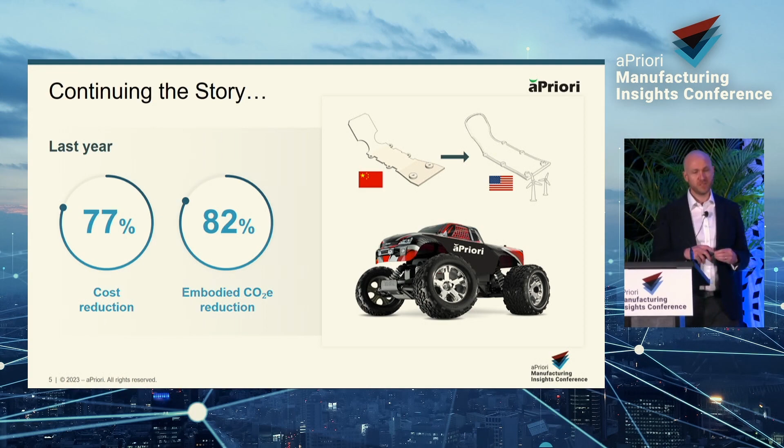So last year, we developed an RC car, which we gave away. And we redesigned a sheet metal assembly into an injection molded component. And we saved 77% on cost and 82% reduction in embodied carbon equivalent emissions. So we've got a pretty high target to beat this year.

And since then, as Peter and Stephanie mentioned already, the world's become a lot more complex. Developing products is a lot more complex than it's ever been. Sustainability is adding additional requirements, and new regulations and directives are adding additional challenges and costs. Competitive pressure is always there, it's increasing, time to market is more critical than ever. And products themselves are becoming more complex, and development times need to be shorter.

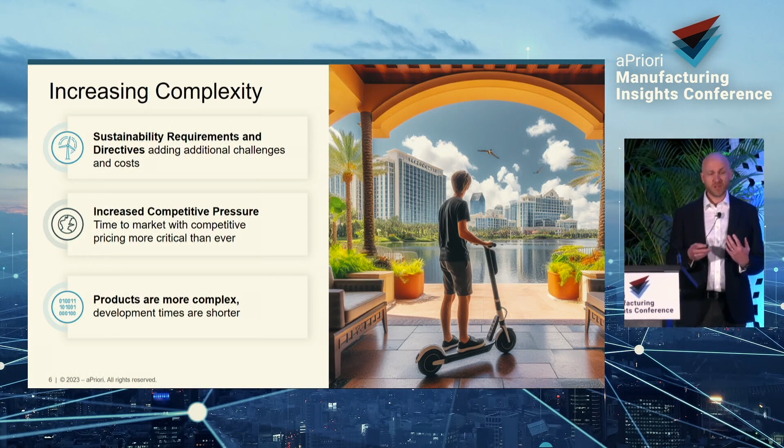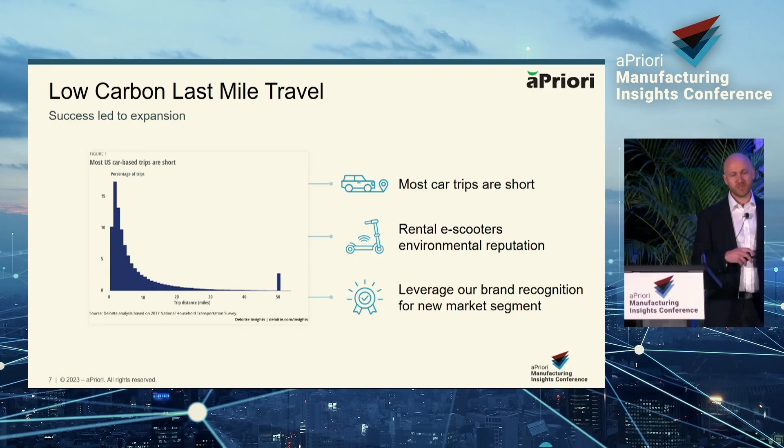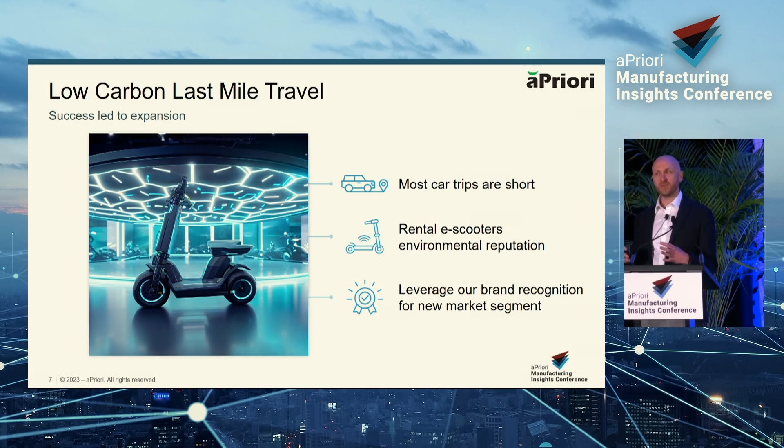So where we're going, since the RC car, we've expanded into e-scooters. The reason for that, most car trips are quite short. Rental e-scooters got quite a bad reputation, as they often get discarded and don't end up in the right hands. They are often confiscated and misused. So what we want to do is leverage our brand recognition from our RC car and move into this new market segment. We've had some initial success in the US, and we want to expand into a European market.

So some of the business challenges. We've got some really strong forecasted growth in the space. But one of the challenges is CBAM. If you've not heard of CBAM, it's the Carbon Border Adjustment Mechanism. It's just entered into effect. It's adding a price of carbon, embodied carbon, on certain materials imported into the EU. So that's going to be a challenge.

Shipping costs are increasing. Can we nearshore manufacturing? That's been mentioned a number of times. Is that something that we can investigate using aPriori? And customers are driving sustainability. They're more aware than ever of greenhouse gas emissions and embodied carbon. So we need to make a significant reduction over the current generation product.

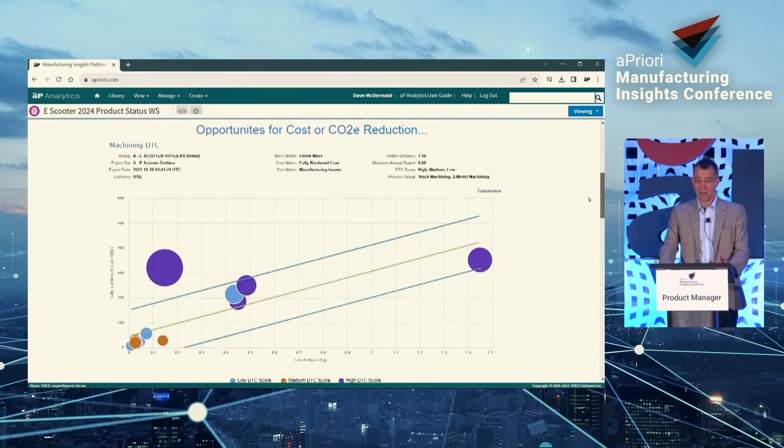And on my AP Analytics dashboard, I also get to see those opportunities to go and talk to the team about. Here I can see for every component, as it's being designed, the dollar per kilogram of weight of that component. And therefore I can more easily spot the outliers. This component here is more expensive per kilogram. This component over here is just heavy. That's an obvious opportunity for carbon reduction.

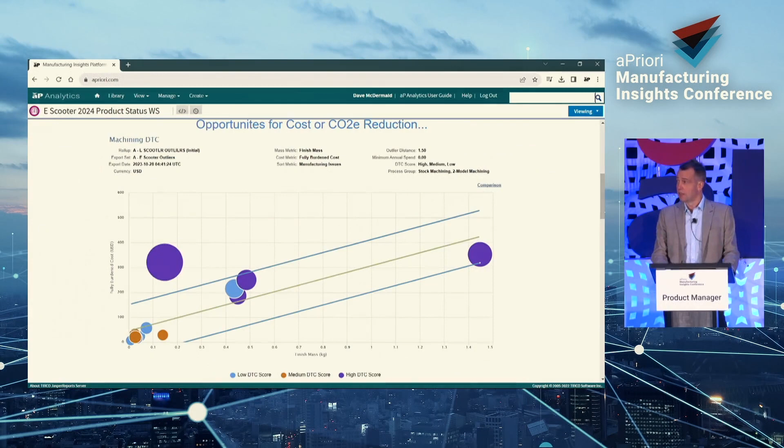I can also drill down to see what all the manufacturability issues are behind them, because they drive cost and carbon too, and talk to the team, maybe look at supporting the design teams with feedback on what they should be focusing on.

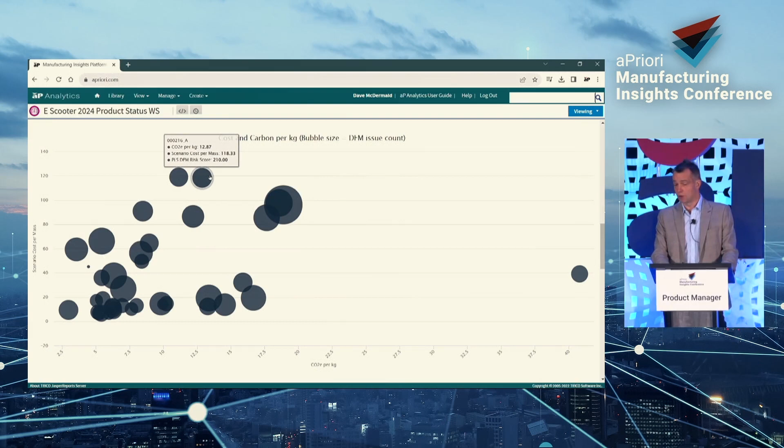This graph here takes those same components now during the design phase, plotted on a graph of cost per kilogram versus CO2 per kilogram. In other words, the bottom left-hand corner are components that are good. The periphery of this diagram are opportunities for cost and carbon reduction. That one there is a carbon reduction opportunity. The ones up here, cost reduction opportunities. And I want the teams to go and look at all those peripheral components and start doing something about it during design.

Now the beauty here is that we have a balancing act to do, but when I have visibility of my cost target and my CO2 target and how I'm against them, I can start to make trade-offs. I could actually go to Norway if carbon is our problem and spend a little bit of money to get that target done at the risk of a little bit of cost.

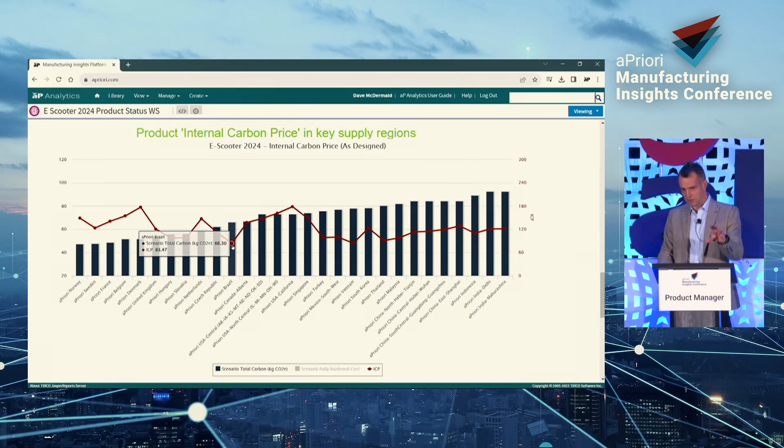Now in there, I'm looking at Eastern Europe as the obvious place for our European market to go, but Brazil stands out there too. And that's interesting because we also have a North American market. And Brazil is kind of a place where we'd love to go, and maybe we could do a bit more maths now to work out what the duty and tax and logistics implications are of manufacturing in Brazil and supplying to North America and to Europe. It's a complicated equation that we just need to get insights into now, because it takes a while to do all this planning.

Bringing the team together to actually take these opportunities and realize them is difficult, so we use aPriori Workspace. We use that to collaborate among different team members. And these team members get to have conversations, and I have visibility of those conversations because they can make trade-offs. They can make decisions in a vacuum that have implications for April. The design can affect the procurement challenge. I get to see what they are and have visibility for how they're getting on with things, because this is my KPI. We've got to meet our objectives. So you've got some real impressive insights to guide the team.

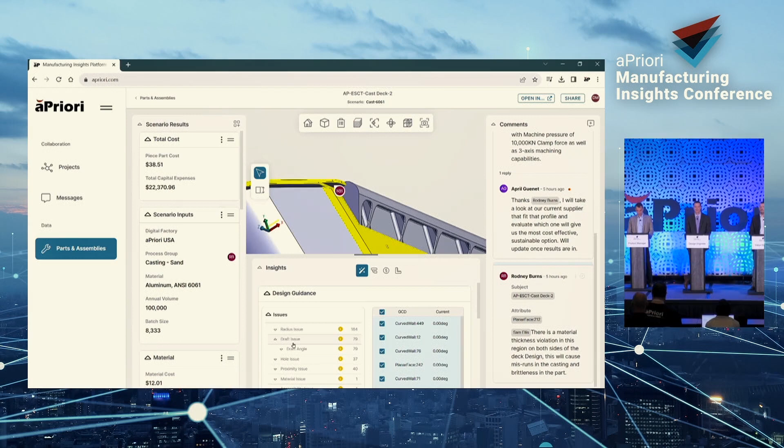So how would you have done that traditionally before aPriori? Well, we wouldn't have. We didn't have any visibility of cost or carbon until it was too late, obviously.

Do you have a slide on that? I do. You do? Oh, beautiful.

Great. So we didn't have any visibility. It was too late. We would only find out the cost when we got to the supplier and they gave us their quotes, which was clearly too late to make any sort of dent on it. So we certainly couldn't identify opportunities either. And even if we could identify opportunities for carbon and cost reduction, it was impossible to collaborate on the real detail of that. So we'd make a decision about the design, and then April would have a real problem in supply chain for processes that are difficult to get suppliers for. Complicated equation that we couldn't get our heads around.

What kind of a difference has aPriori made here? Well, first of all, we used to miss our targets every year. In fact, most companies do, but we are hitting our targets now. We set a target cost and we get there immediately. Same with carbon, because it's becoming important for our business. We've set objectives to the marketplace. So we get them done. Because we can actually realize opportunities in cost and carbon improvement, because we get the insights early and we have time to do something, we're actually overachieving our targets now for the first time in our history.

Which means I can sleep at night. Good stuff. So Sam, you've got the guidance from product management. Talk us through your workflow when it comes to the new scooter design.

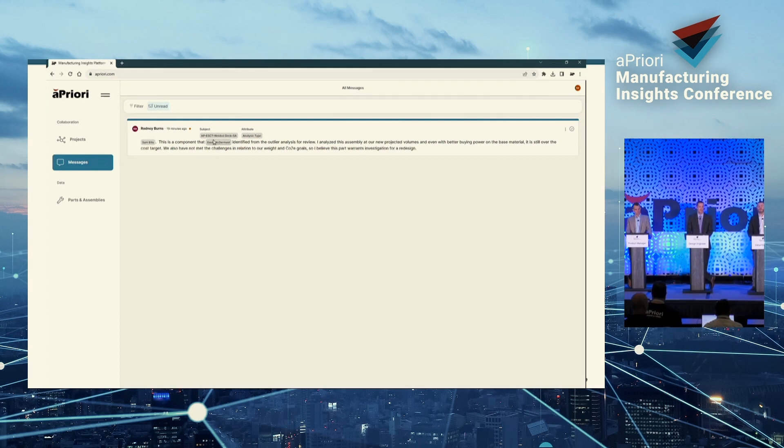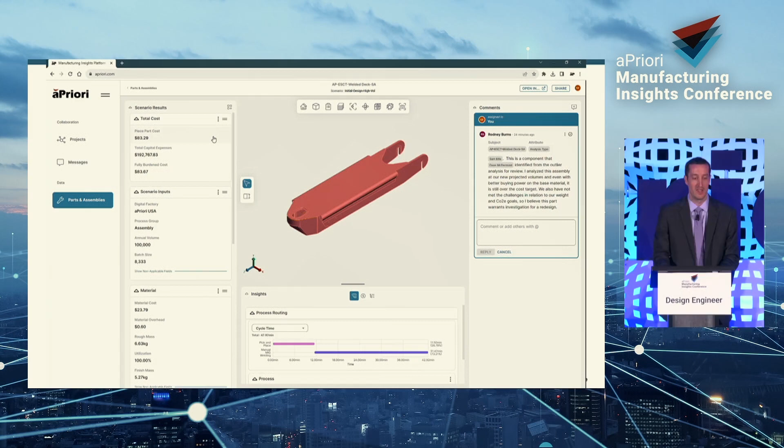Sure thing. All right, so it starts off, I get an email, and I can see it's a message from my buddy Rodney in cost engineering. And what's nice is I don't have to search through old Teams messages. Everything that's relevant to the scenario I'm looking at is all loaded in AP Workspace. And I can quickly visualize that in aPriori Rodney analyzed our existing assembly at the new higher volumes, but we're still coming in over our cost targets. And we're over on weight and CO2 as well.

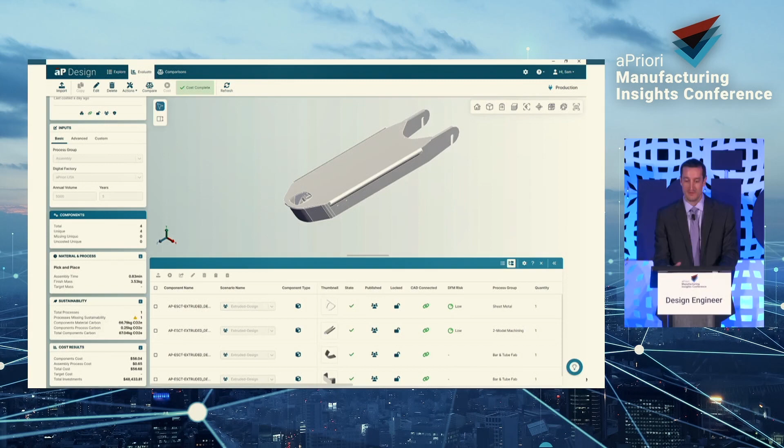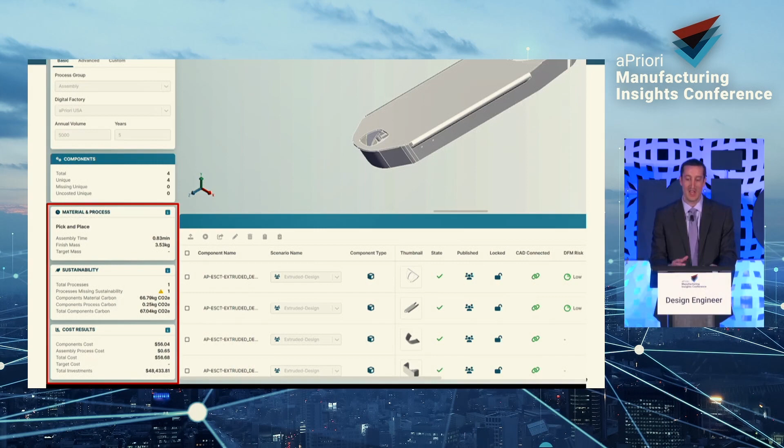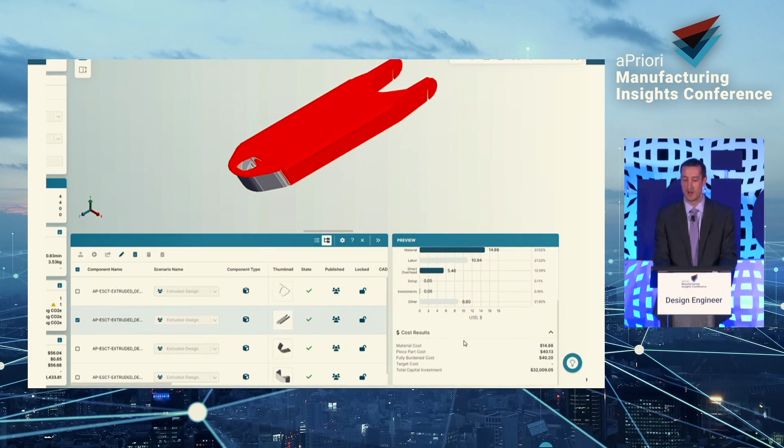So I need to go back and redesign this part. And my first idea is to reduce the complexity by lowering part count and going with some custom extrusions. And that decreases my cost, sustainability, and weight. But I'm still coming in a little high, mainly due to that large custom extrusion there that's making up the majority of the cost. So maybe I want to consider a casting.

And instead of spending the time going and redesigning, I'm just going to shrink wrap that assembly into one part and then rerun that analysis in aPriori. And obviously, this isn't designed for a cast part, but I can quickly see from a directional standpoint if this is going to make sense to spend time on in CAD.

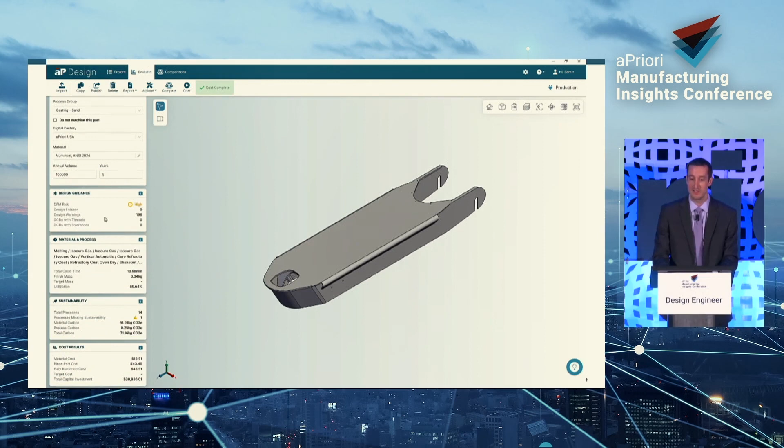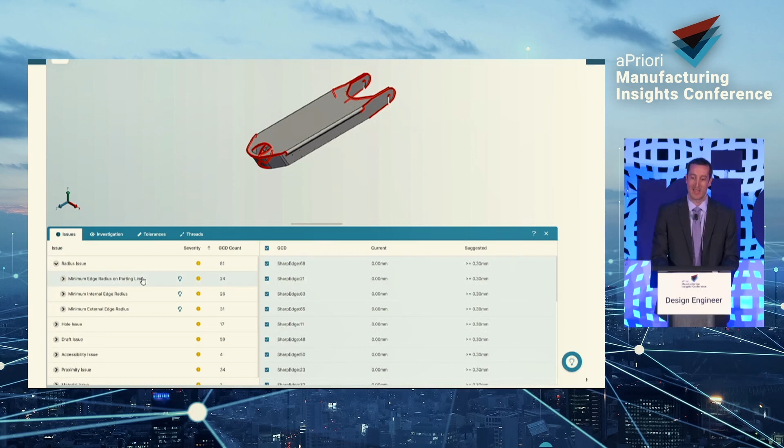So I'll launch that directly into AP Design, specify my parameters. I'm staying with aluminum 2024 that I used in our existing product. And I can see that I'm going in the right direction from cost. I reduced that from our extruded weldment there. But I want to now get an idea of, OK, when I go back to CAD, what do I have to take into account when I design this cast part?

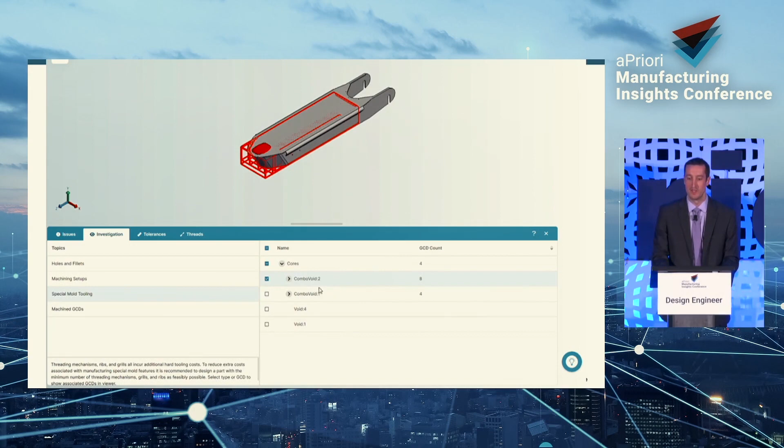So I can look at any sort of issues that aPriori is highlighting. And if I need to understand why something is critical, I can always open up a tooltip to let me know why that's important. Under the Investigation tab, I can take a look at the special mold tooling to understand what complexities are involved with this current part. So how am I going to redesign this to avoid that complex tooling?

And back in the CAD system, you can see I now redesigned this, eliminated those complex tooling areas, added in some draft angles, and now I'm going to just repeat that process, launching into AP Design and specifying my same parameters as before. And what's nice is that this is only taking me a few minutes, right? I live in the CAD system most of my day. I can just quickly run and understand how that's going to impact my part.

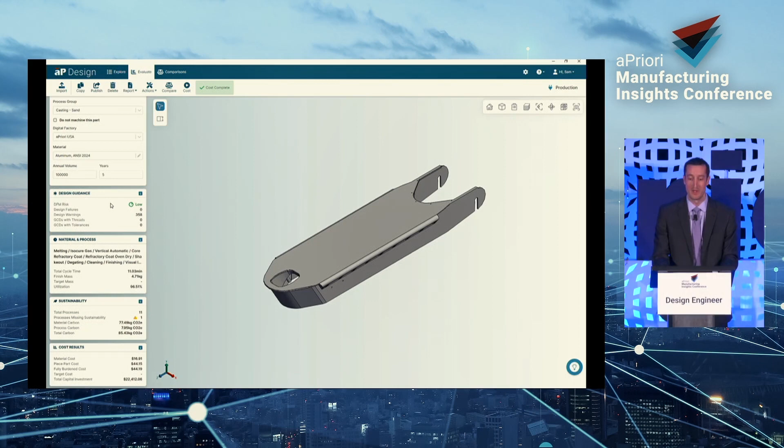Right away, I can see my DFM risk is low, so that improved. My cost is decreased a little bit, which is nice. I'm a little higher on that weight and sustainability, but these are all trade-offs that I can then deliver to my project manager, Dave, and he can deliver the best product possible for our customers.

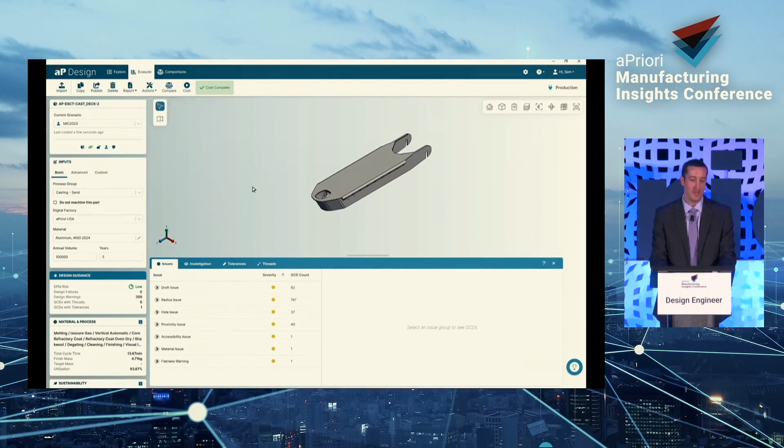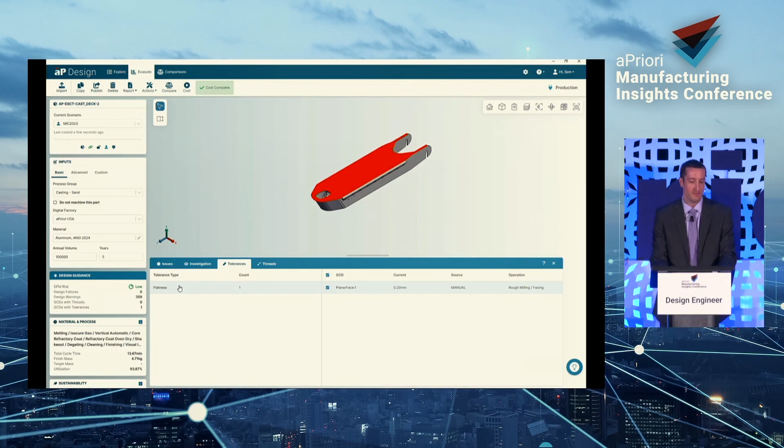And if I want, I can start playing around with tolerances now. So maybe we had a quality issue with the stomp pad before. We had poor adhesion. So I want to understand how a flatness tolerance will impact the cost of this part. When I reanalyze, I can quickly understand what tolerances are driving any sort of specialized finishing. In this case, a machining operation has been added. And I can understand how I have to back off that tolerance in order to eliminate that as an option.

So once I'm confident with my design, maybe I'll have some tweaks here and there, but I'm in a good space for now. I'm going to come over and tag April in procurement to let her know that we're looking at a casting part. But do we have any extrusion or casting suppliers who we're really confident with currently? I also want to ask her about the material choice, right? Our current selection was aluminum 2024, but maybe there are some similar alloys that we get better rates on from our supply base, and we can extract a little more cost out of this part.

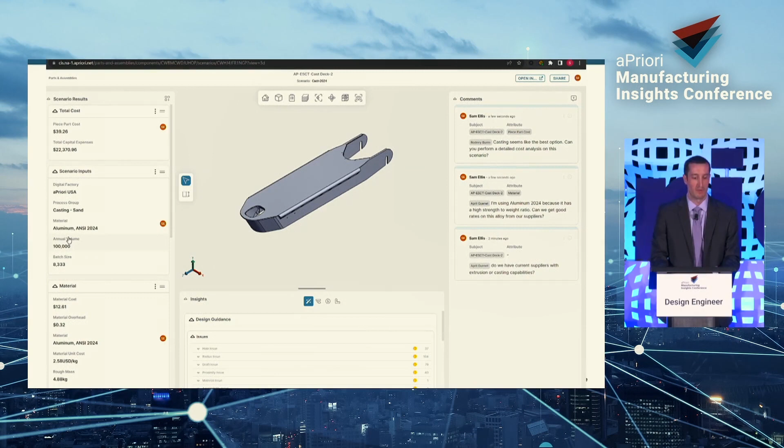And finally, I'm going to tag Rodney in cost engineering, let him know I'm confident with my current design, and he can perform a full, robust cost analysis, maybe do some other trade-offs to understand really what's going on with this part. And now that I'm done, I can go back and work on some other redesigns.

Thanks, Sam. So I can see you've really learned a lot about those designs by running them through AP Design. So how would you have done that before? Yeah, the short answer is we really couldn't, at least not to that extent. Our design process was really quite siloed, and we'd rarely get feedback from other departments until after we completed the design.

So using this platform approach, what's this new way of working really enabled from your perspective? Well, as you saw, I can run through way more design iterations than I could previously. So I can look at cost, manufacturability, and sustainability insights, and that allows me to eliminate or pursue an option without waiting weeks for feedback from other departments or from suppliers. And now I can pull in my other stakeholders to collaborate earlier in the process than I did before.

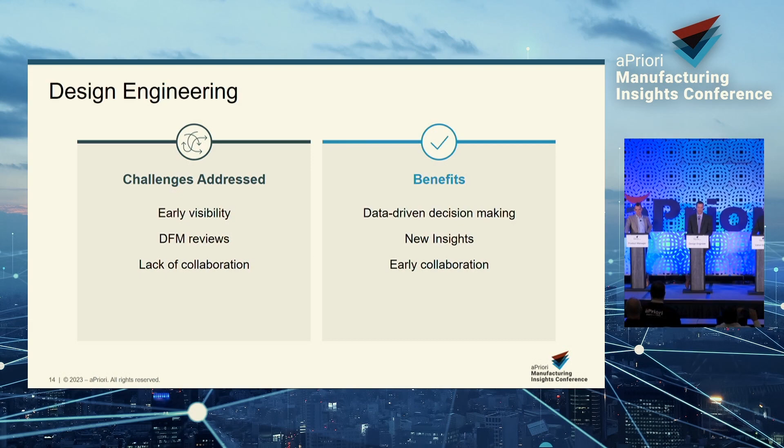Great. Thanks, Sam. Now, Rodney, in value engineering, we've already heard you've been inputting into the project, both from product management and design engineering. So lots of collaboration already. Tell us about the role you played in developing the e-scooter. Sure, no problem. So I'll start off. Dave mentioned at the start he found an outlier on the chassis, and he asked me to investigate it as part of my role in value engineering.

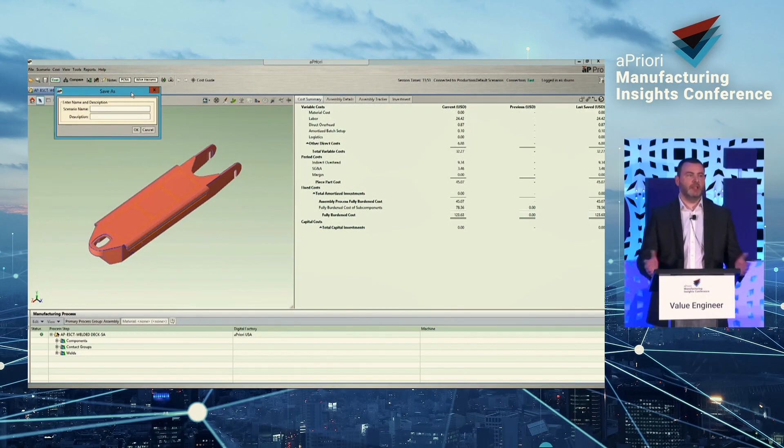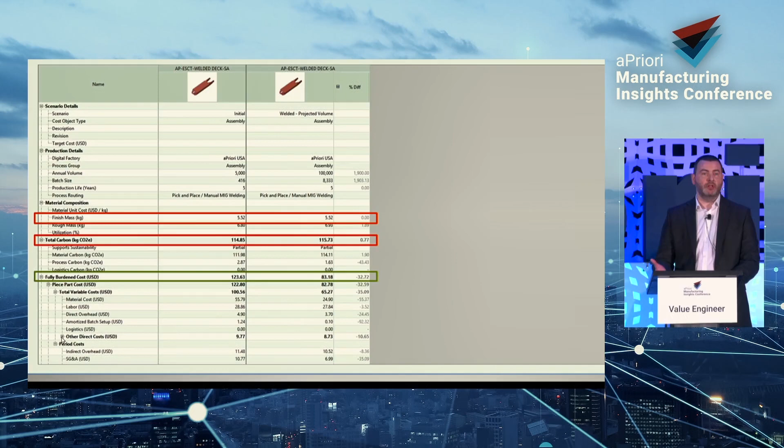So my first port of call here is I'm going to scale that up to the projected production volumes to see will the existing process scale with our projected volumes, and I want to get that answer as quickly as possible. And the simulations are very quick and concise to run, but I want to see it's a multi-variable equation. It's not just cost with trade-offs. But you can see we can scale a little bit with volume, but we're going to fail on our sustainability goals and our weight goals, so I can notify Sam that it's a candidate for redesign.

But that's a two-way street. So as Sam mentioned, he notified me in AP Workspace that he's looking at a casting now, he's redesigned it. And we mentioned there an alternative material. So again, value engineering, I need to determine if it's economically viable to do so. So I'm going to start to look at this component as an alternative material. Does it make sense? So I can look at that from not just a cost perspective to see what the implications of the source material are, but also from the sustainability perspective as well.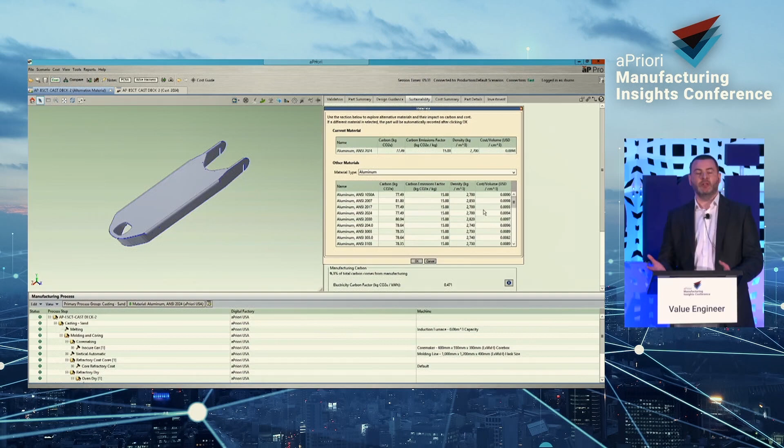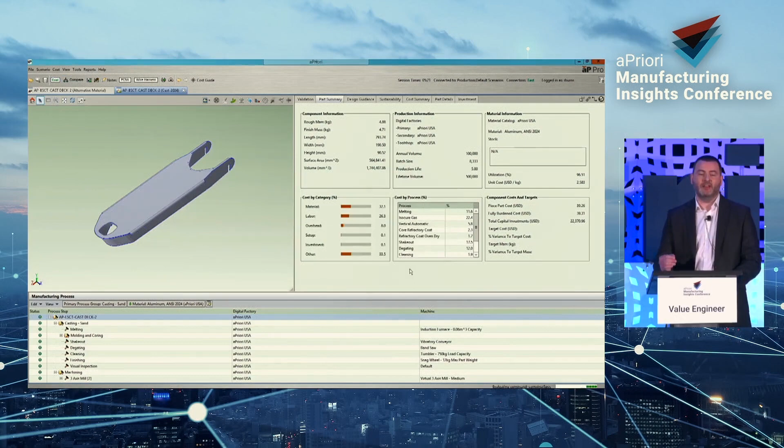These are trade-offs. What lever I pull will have an impact on another one. And again, it's a multi-variable equation, and I can get those results. But I first want to see, is it viable to take forward and investigate further with people's resources and time? So again, I want to see these in an easy, digestible manner. So I'm going to run these as that comparison analysis again, so I can see those trade-offs very quickly, very concisely, and get to that value assessment as quickly as possible. We don't want to waste time.

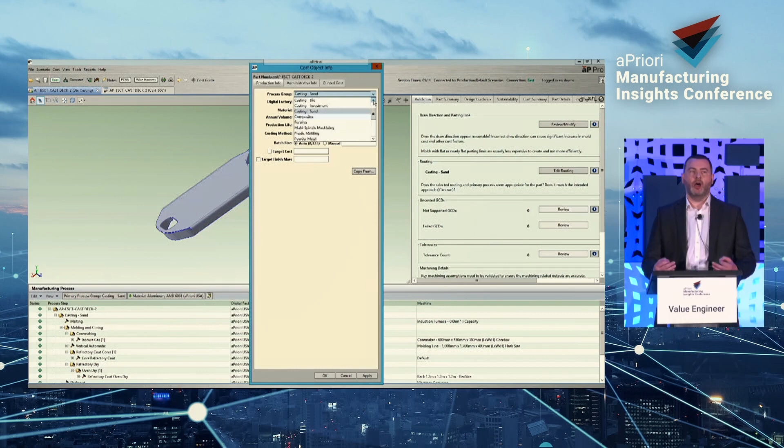So you can see here that there is a small improvement on the actual cost, but there's a significant improvement here on the sustainability. So I can tell Sam that's a viable option to go with and let him continue. But because he's told me he's designed this as a casting, my thing is I want to get the optimal manufacturing process as quickly as possible, so I can run this through various manufacturing methods and methodologies. So I'm running this one as a die casting to see if that's a more viable solution. We have some sand casting productions from the RC car from last year, but I want to see, is that our optimal process to meet our cost targets?

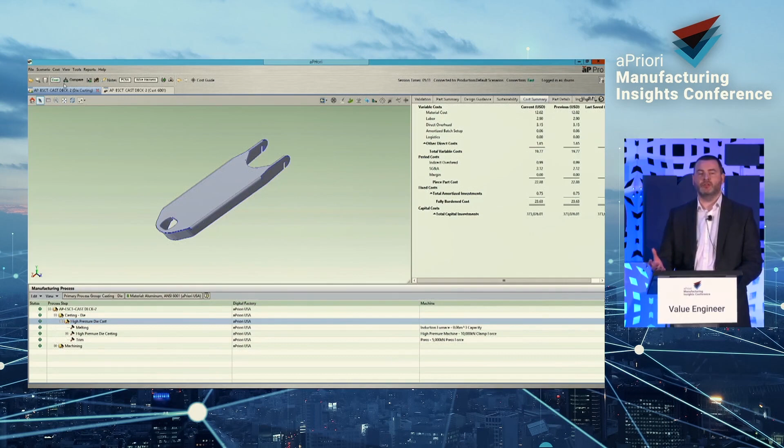So we can see the process here, and there's a new should cost, but again, I want to do that trade-off analysis. Should I make it in-house or should I buy it? What's my capital investments? These are all things that I need to understand to make those decisions going forward, and I want to get to them as quickly as possible. So you can see here in this case, we have significant savings in both cost and carbon as well. So I know die casting is my optimum process here.

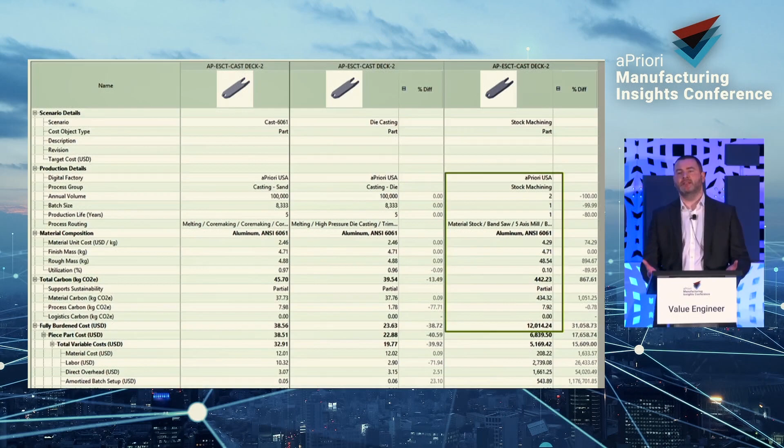But because of the speed of these, April had mentioned to me in conversation that she often feels for prototyping, she pays above the fair market price, and it's an assumption, it's a feeling. I quickly ran a simulation while grabbing a coffee on stock machining, and now I can pass downstream some indicative prices as what we should expect from a should cost sort of aspect.

Now, as a value engineer, I want to get to that optimal manufacturing process as quickly as possible, but I want to see it in much more granular detail. Once I find my primary process, I want to optimize and refine it and effectively mitigate risk. I want to avoid challenges in the manufacturing process. So here we can see I'm looking at a wall thickness issue that's been highlighted. We're under the 3 millimeter tolerance here, so there's locations. And I can use aPriori to actually find those locations.

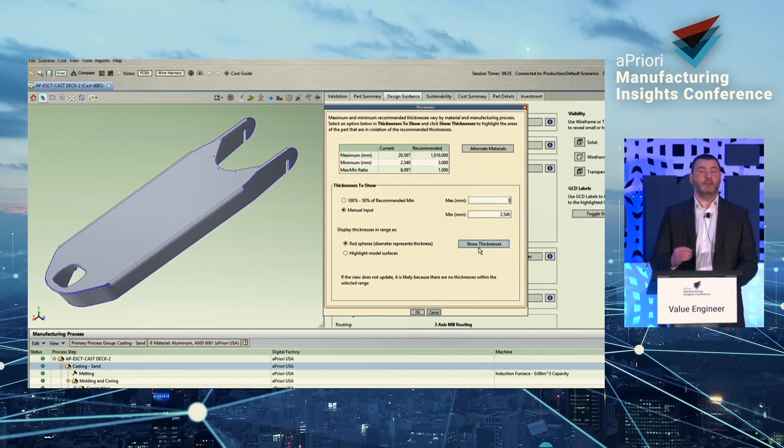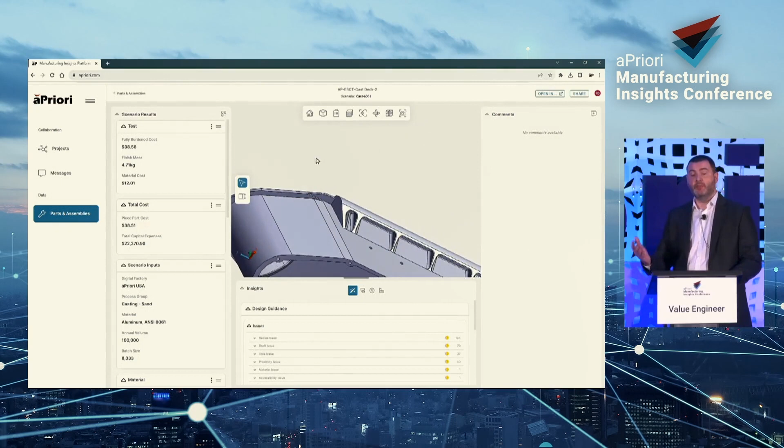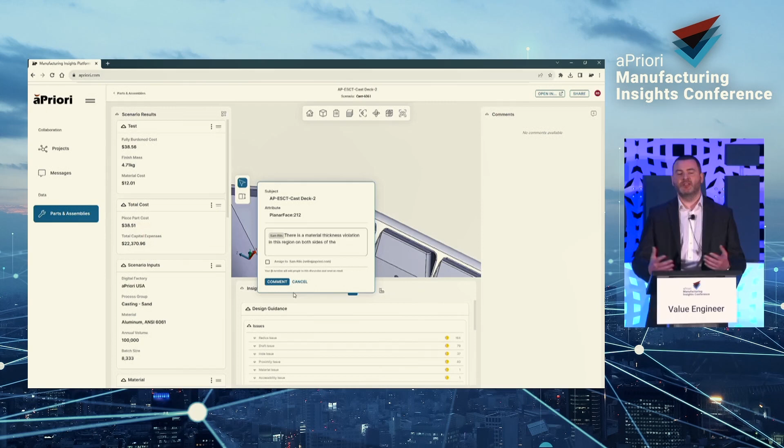This is going to increase scrap either for me, an in-house manufacturer, or the supplier. And I can identify where these regions are through AP Pro. Now, in AP Workspace, I can go in and highlight that issue directly visually for Sam in design. And I indicate where the issues are, but also the implications of that issue. It helps build his knowledge and get to those decisions. And he can refine his design before he releases it, because we don't want to waste time going through lengthy engineering change order processes. So Sam can go to that directly and make any amendments needed.

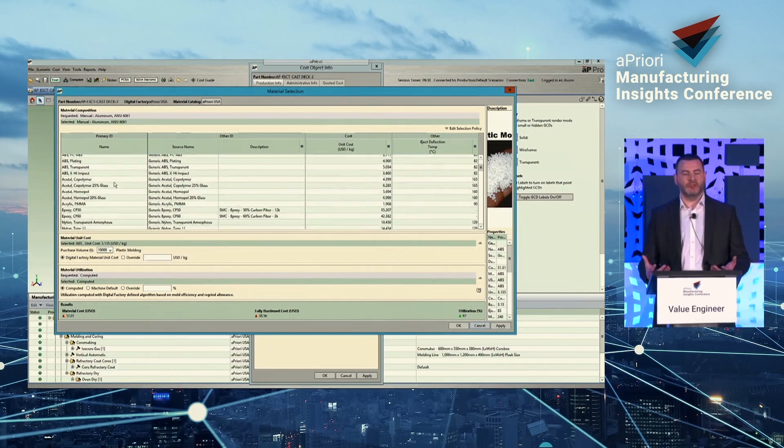But that's upstream. One of the other things is I can now optimize my time as a value engineer and look at other options I wouldn't be able to do. So in this case, the material thickness gave me the idea of, well, what if we did this as a plastic part? We can start to test assumptions and theories and look for viability elsewhere within that value rule. So I can see this part, there's some viability, but I don't want to waste time for Sam redesigning the part. So in this case, I'm going in and I'm actually going to change the nominal wall thickness without wasting his time doing CAD changes to see, is there viability in taking this forward and investigating that and applying those resources before we do any FEA analysis or wasting time.

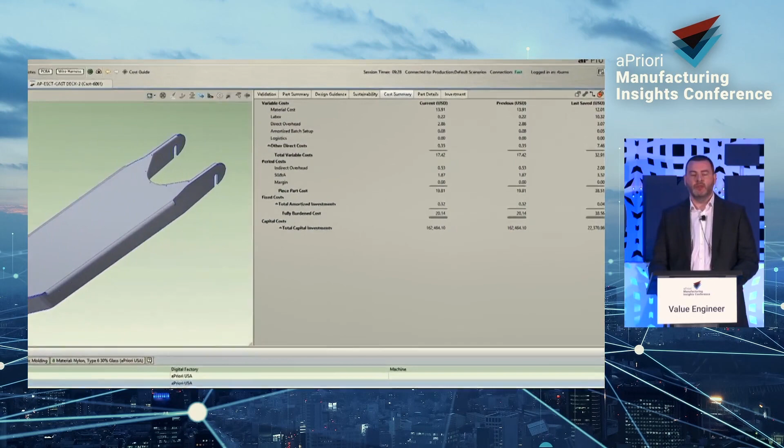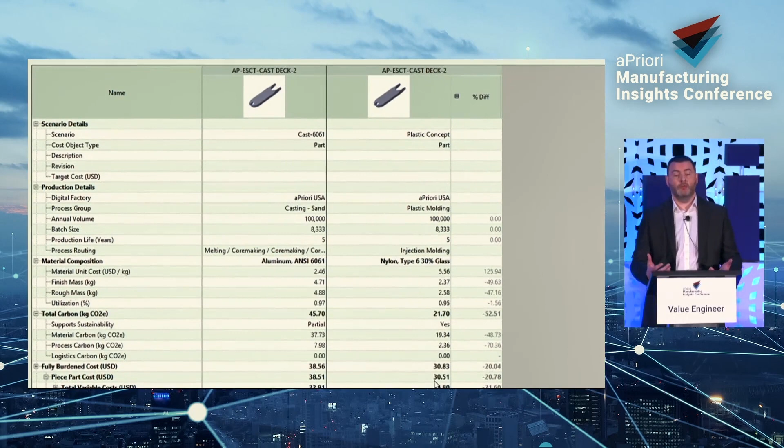So we can see there is some degree of viability here. We started off with a cost just below $39, and we're now down to just under $31. So when you scale this across our volumes, there's significant savings to be had there. So I can notify Sam of this and say, we are making improvements both on cost, but also on our carbon as well. So can we please investigate? And I'll collaborate with Sam and he'll give me some feedback back and forward and we can refine that without too much effort. And I can actually then see, is it a viable solution?

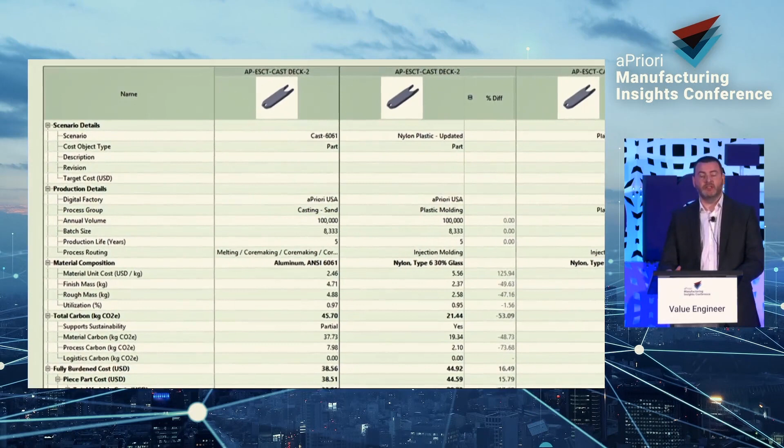So the updated design here, we can see, yes, we made significant improvements on our CO2, but our cost has now gone the other way. So it's no longer a solution for us. So we can eliminate them much earlier in the process before we get to a gate review.

Now that's upstream support, but it's a two-way street, so I can pass that downstream as well. So now we have done the make versus buy. I can now notify April in the supply chain and give indications of what the actual requirements are from the supplier, from manufacturing requirements. So what types of equipment, machinery, et cetera, are we going to need to optimize her supplier selection when she comes to have those discussions around her sustainable sourcing strategy as well.

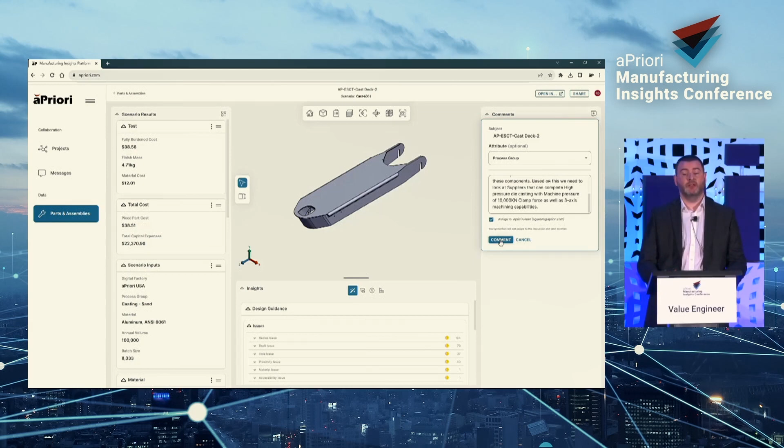Very impressive, Rodney. So we know value engineers are usually massively outnumbered by design engineers. So that potential bottleneck, is that the main issue you had before? It was a significant issue. Previously, we would have been used as the resource to pass information on should cost, et cetera, both upstream and downstream for make versus buy. And it very much was a challenge of, let's just get it done. The resources were there, we just had to get an answer and get things into production. But because of certain things we can do now, where Sam can eliminate some of the design challenges he would have requested information for, it frees up my time more now. So it's now gone from a let's just get it done to let's get it done right. So we can optimize more and expand on that.

So what would you say the main benefits are that you found by leveraging the Manufacturing Insights platform? It's a single safe source of the truth. So everybody's collaborating on the same scenario. And often value engineers, multiple engineers will be on a project. So we can hand off information and detail the assumptions and calculations we've done within that, and everyone can work on it. Also, the fact is, it's fact-driven decision-making. So it's no longer down to someone's experience, someone's skill sets. It's black and white, it's there in front of you. So it gets to that decision-making much, much faster, but also for new insights. I'm not an expert in plastic molding, but I could go in and learn more things and try more things and learn from the tool without having to be an industry expert in that field. Expand my knowledge. Great. Thanks, Rodney.

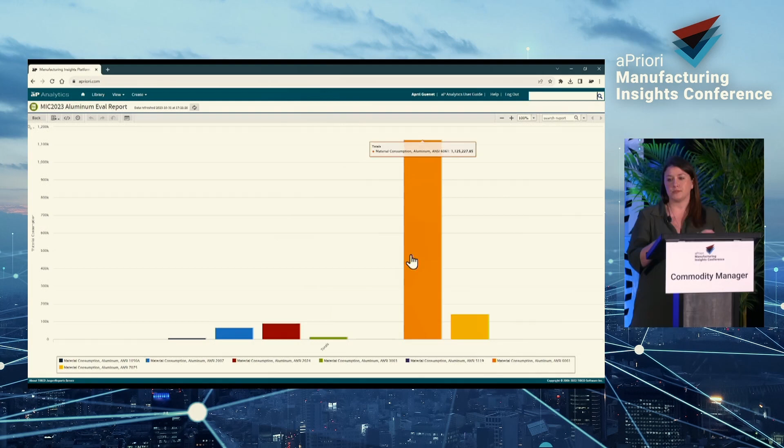So as you had mentioned, I was able to guide some of the colleagues on a more cost and carbon-friendly alternative. And the way that I was able to do this was through a material consumption analysis within AP Analytics. So it allowed me to take a look at how we're using aluminum alloys and what we were using the most of. So this really outlines and provides an outlier of, we're using a lot of this 6061 aluminum.

Perhaps we can use that as leverage to getting a significant discount for increased usage. It also gives me a little bit of an indicator of further analysis should we have some high demand or price increases on that 6061, that maybe I should look into alternatives or diversifying the supply around that particular material.

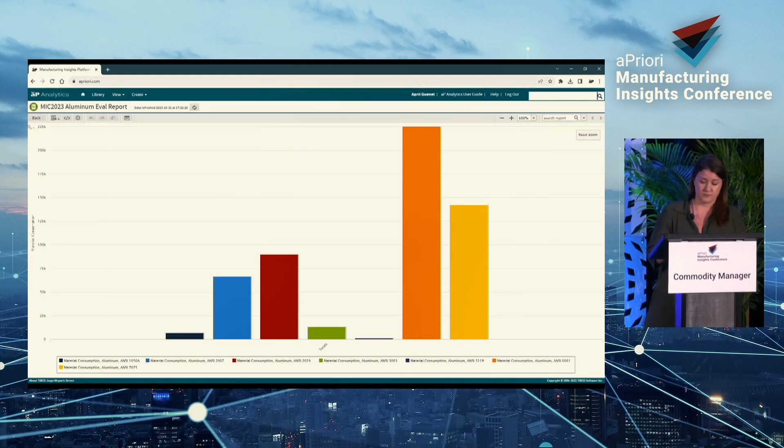So the next thing that I did was I took the feedback that I received from Rodney around the manufacturing process guidance, and it allowed me to only target the suppliers that meet the specific criteria to do further analysis and try and target where exactly I want to go in terms of locations for this particular part. So because we were looking to expand into Europe, a lot of the selected areas were from known suppliers that are in Europe. And just to have a little bit of comparison, we also tested a little bit in Asia.

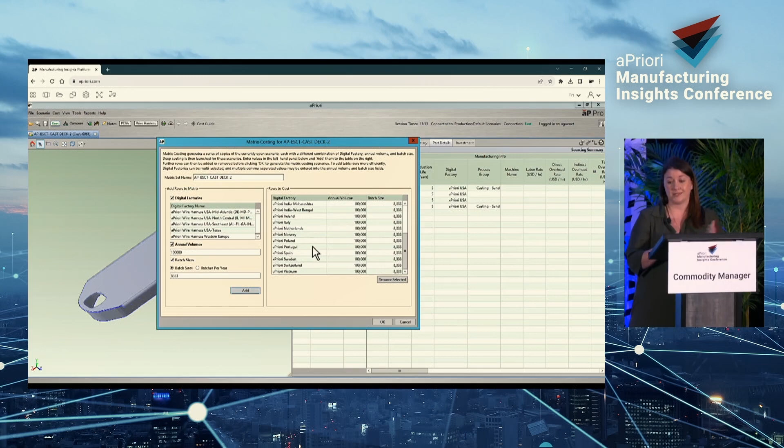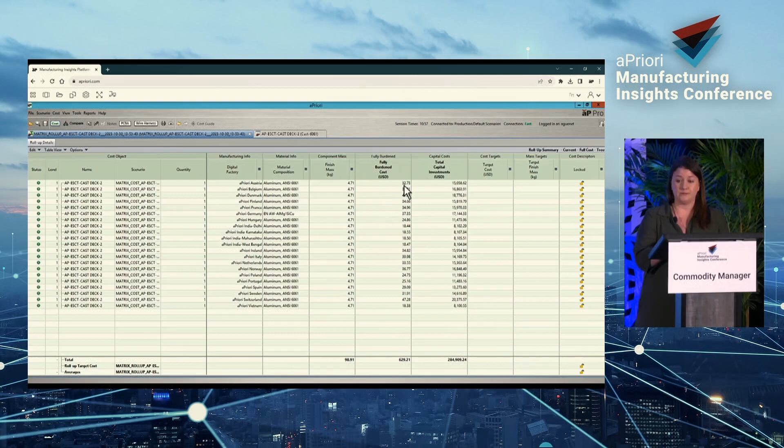To do this, we performed a matrix analysis, which basically allows you to select all of the digital factories that are required, pick the annual volume and batch size, roll it up into one scenario, and analyze it in bulk. This allows me to automatically, within minutes, be able to analyze costs for all of these regions and determine really where I want to go. This roll-up also makes it really easy to determine that Vietnam seems to be the option to investigate further for this particular part.

Moving on, once the part design was finalized, it was time to secure the production with the supplier. So we sent out a few quotes to Vietnam, our top-tier choice, Hungary, and Portugal, just to give a flavor here. And we had a few discrepancies come with the Vietnam quote, one of them being an overhead rate that was 30% higher than our typical quote suggested. And the supplier said it was due to a 30% increase in energy consumption.

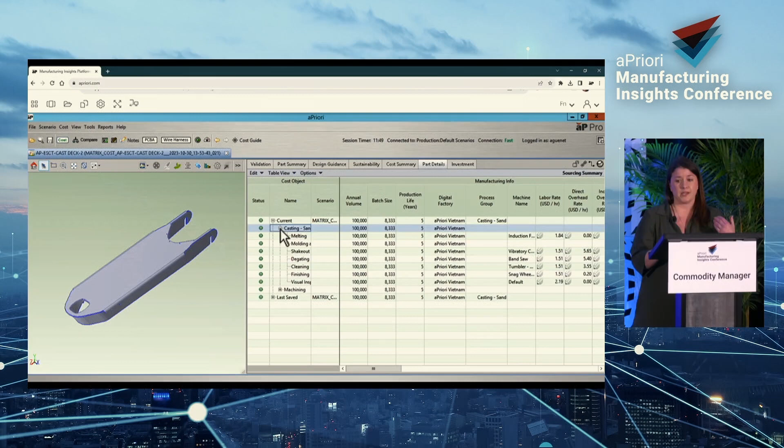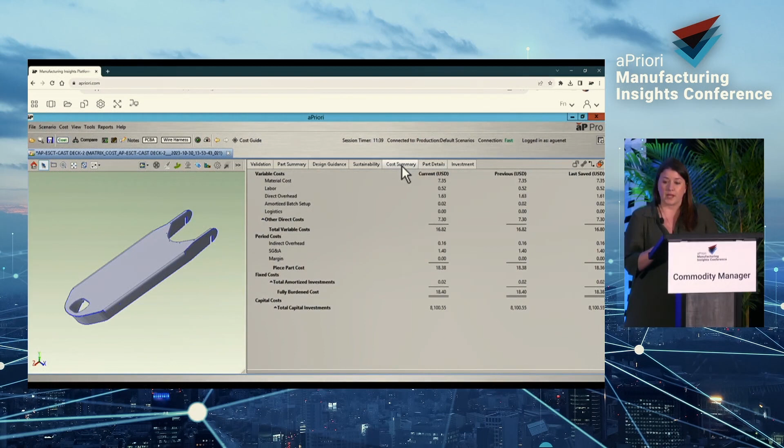So I went into the scenario and looked at the energy consumption within our direct overhead rates and did a manual override just to really evaluate and double check that that specific increase was really valid. Once I did that, I recosted the part, and while there was an increase in energy consumption, it really didn't have a direct impact on cost.

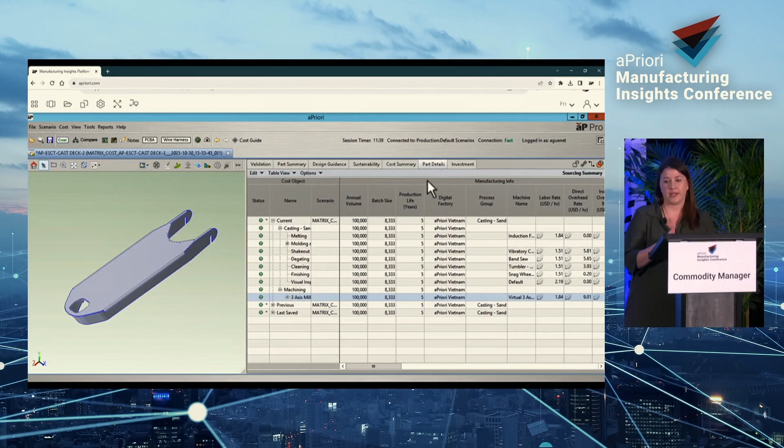So I can take that data back to negotiate with the supplier and make sure that we're actually meeting the quote to our specifications. And as you can see, I also have a view of the override summary, so I can take a look just to double check my work and make sure that when I'm negotiating with the supplier, I really have that in my back pocket and can use that as fuel to guide the negotiations.

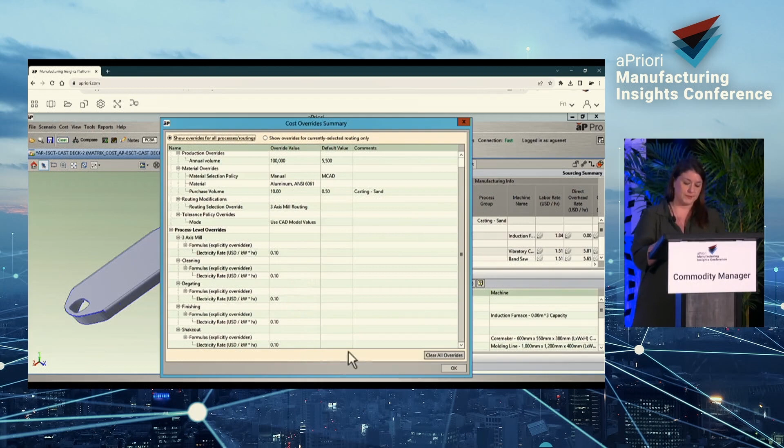So now that I've had all of that time up front really working on addressing some of those issues, I have more time to focus on more strategic initiatives, such as the final assembly and production location for the e-scooter. So going back to the report that Dave had showed earlier, you can really see that we're testing those specific locations and looking at the first metric of the fully burdened cost.

So as you can see in the Far East, it's looking like the costs are good, but that's not really the full picture here. So we're going to take a look at the total carbon to really understand where it all lies. As you can see, while it's more cost effective in the Far East, the total carbon is too much. However, applying the internal carbon price metric, I can easily pinpoint that Hungary, Portugal, even Sweden are showing some areas of potential locations to identify further.

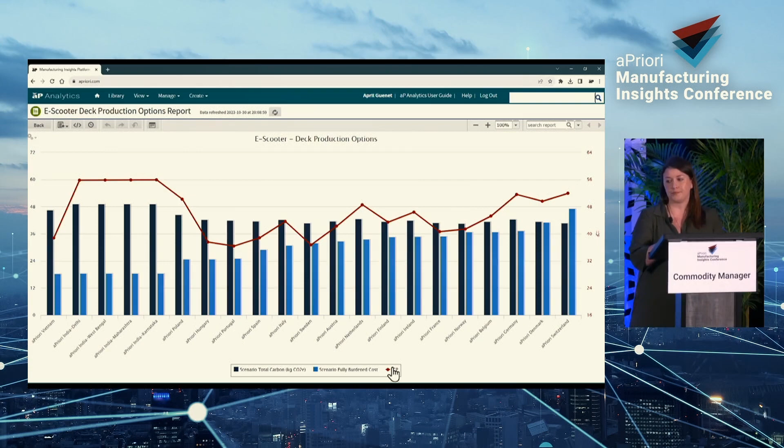Very impressive, April. So how would you have tackled that before? Honestly, I was usually brought in late to the game, so I wouldn't have that collaboration with design engineering ahead of time, and usually it was only if there was a supplier problem. So a lot of that collaboration that was happening downstream really impacted meeting our target costs and target carbon as well. So usually that would lead to some sort of supplier feedback that would then come back and have a costly engineering change order that would take place.

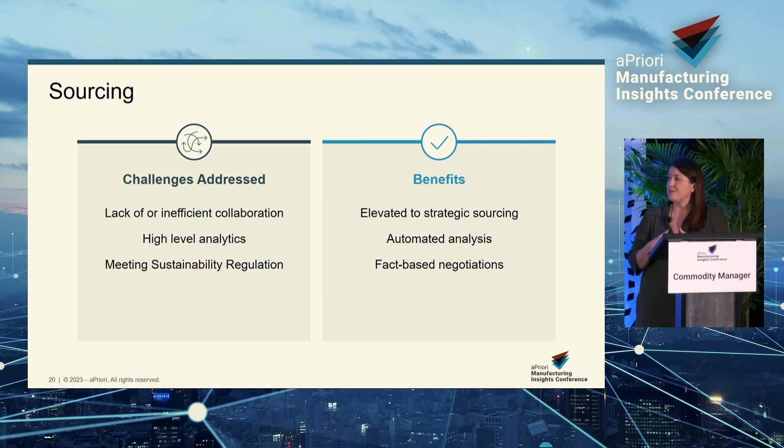So what's this new platform approach really enabled from your perspective? Yeah, so by being able to provide that feedback up front, I'm more proactive and less reactive to problems coming up downstream, which gives me more time for that strategic focus to elevate into more strategic sourcing. And then also using that data to have the fuel to guide those fact-based negotiations and have really easy to access data at my fingertips to have a really transparent conversation with my supplier.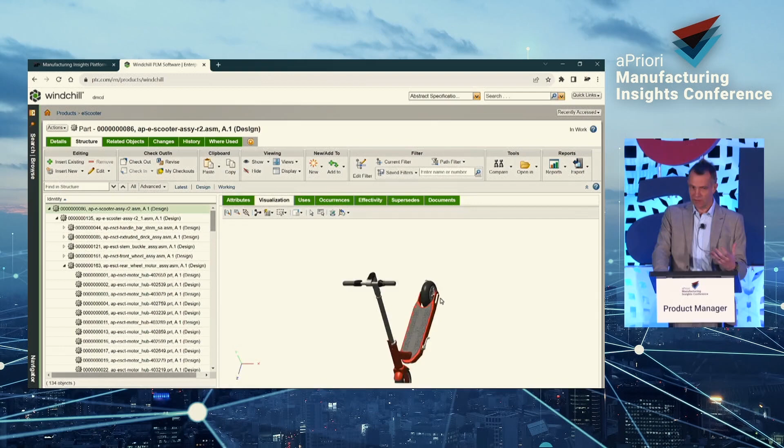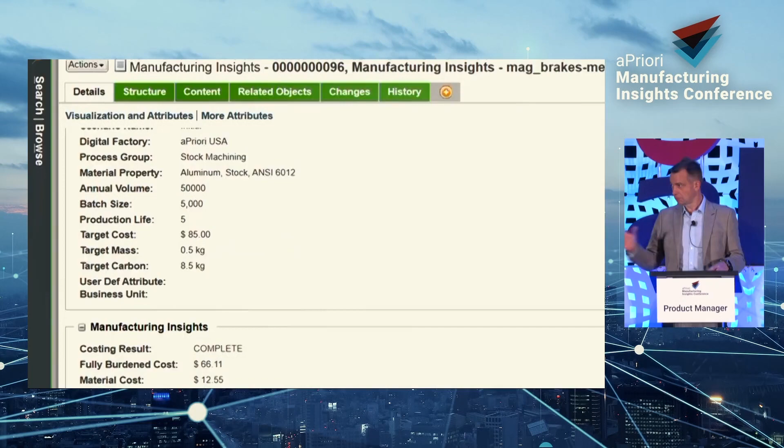Now, to get to this point, we've had to analyze thousands of scenarios. I mean, it's not just this product. Do we use lots of resources to do that? No. We use aP Generate. And in the background, aP Generate goes off to our PLM system, grabs CAD data at the right stage in its product lifecycle, its right maturity, like this component here, and just runs the analyses in the background. Those analyses take data from PLM as well about the component's material and its process group and other factors as well. Run the simulation while I sleep, comfortably, I might add, and produces results that go back into PLM, the same results that these folks have been looking at as well.

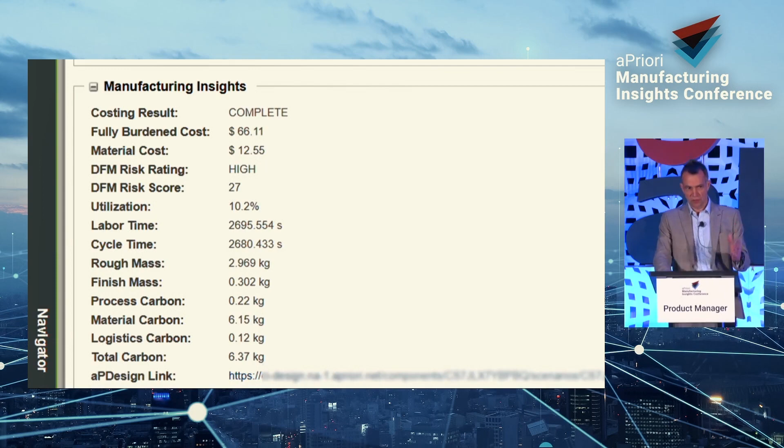You can also see down the bottom there it also maintains a link that takes people from PLM to the detailed insights that show cost drivers and what the DFM issues are that are important to them. So our PLM now becomes the real single source of the truth, the real digital twin of everything, not just the product definition. And we use that in stage reviews. Our gate reviews take cost data and carbon data as well into account.

This information then gets rolled up into its configuration context inside PLM because we have lots of different product variants, different countries we're selling into, we have different configurations for each of these countries. Hugely complicated equation. Making that data available to our PLM is good for other people in the business. We're not just the only ones. Very powerful asset. It also speeds up their job too.

Excellent. So when it comes to complete product development projects, where were the difficulties before and how has aPriori made a difference? Well, that link to PLM didn't exist before, so everything was manual. And those people that relied on the data that we had at our fingertips, it was either typed in wrong or took a long time to do or just never quite got there. So we removed a lot of the error-prone stuff.

As a result of that in the previous existence, we had limited business intelligence. So therefore people at the shop floor were making decisions in a vacuum without knowing what the real implications of a strategy would be in terms of cost and carbon, the things that we care about, the things that, well, I get paid on. But with our new world, with our manufacturing insights platform, we are avoiding cost overruns. In fact, we're overachieving. We're hitting our carbon targets. And we have real-time visibility to progress because that's what's going to make our business work.

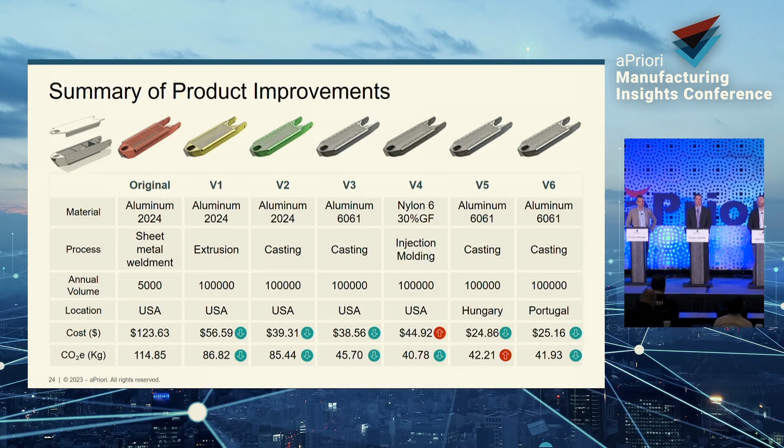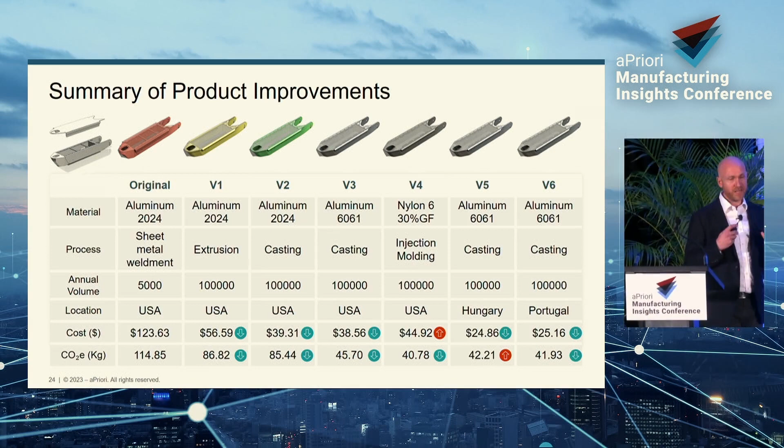Excellent. So the team's done a great job. They've been able to look at a number of different iterations and not only improve upon, but also innovate, try new ideas and validate them or rule them out completely. So you can see all of the different iterations that have been gone through, and leveraging the departmental data and their expertise and this holistic design approach really enables agile product development. So this year, we managed a cost reduction of 80% and an embodied carbon reduction of 64%.

So to summarize, obviously I expect a carbon and cost reduction using aPriori. We've lowered the cost, we've reduced the environmental impact. It's obviously added value to our products and increased our profits. But we're able to innovate. We're able to fuel that funnel and add new ideas, look for opportunities for innovation. Early validation means we can add value, and everything we run through aPriori adds value. That's intellectual property. Design decisions are intellectual property.

We're removing traditional constraints so you can try out different things without necessarily having the knowledge there. And collaboration is critical as products get more complex. We discussed that earlier. Having the single source of truth means the data is all in one place, and having the connection to PLM, we can really augment that PLM data so that you can really benefit from that investment and reimagine your digital twin.